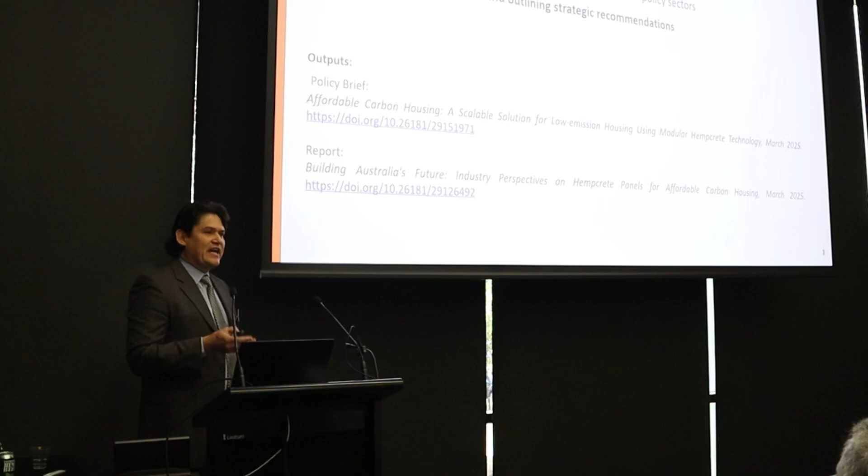Scalable modular Hempcrete panels, alignment with national carbon reduction targets and housing targets. Our next speaker is again from a sponsor, La Trobe University. It's a great opportunity now to hear from, we have a sort of double act happening. We have Dr. Ernesto Valenzuela and Professor David Fleming from La Trobe University. They'll be talking to us about affordable carbon housing using Hempcrete modular panels. I'm sure that'll be close to the hearts of many people here going, well, how can we build out of hemp? Modular sounds like a logical way to go. Industry insights and future actions.

Thank you for the opportunity to be here. It's a great audience to have. It's a privilege. Feeling like I'm preaching to the choir. Everybody's a supporter of the industry, so it's very different than our world of academia. We have to convince the editor and the reviewers.

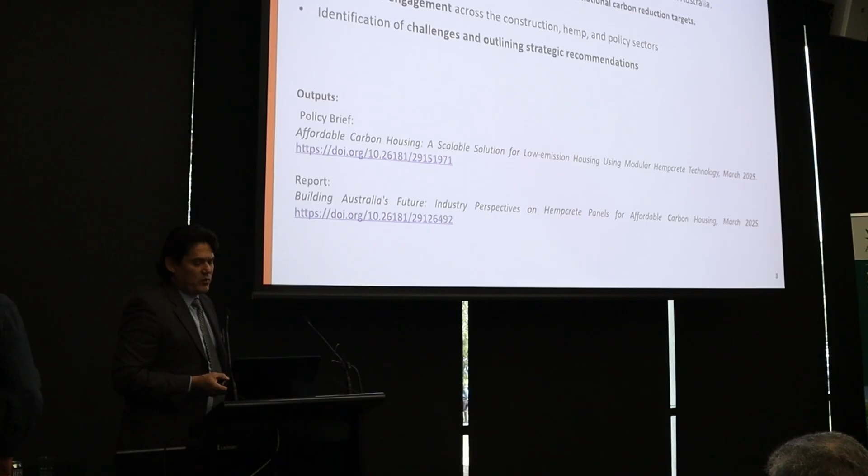We're tasked with an exploration of what could be the potential of Hempcrete to support sustainable housing construction in Australia, with a particular objective geared toward scalable modular Hempcrete panels, and what could be the alignment with national carbon reduction targets and housing targets. We involved stakeholder engagement with members of the construction, hemp, and policy sectors. We identify, for our conclusion at this level, an identification of the challenges and outlining of some recommendations for future actions.

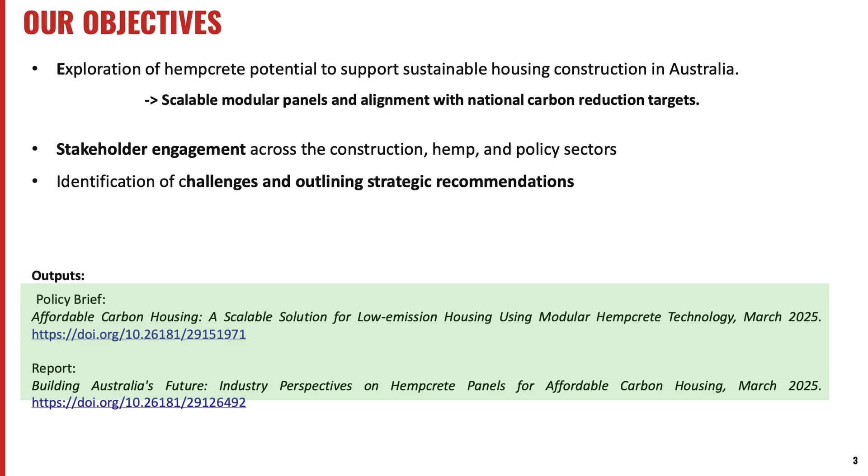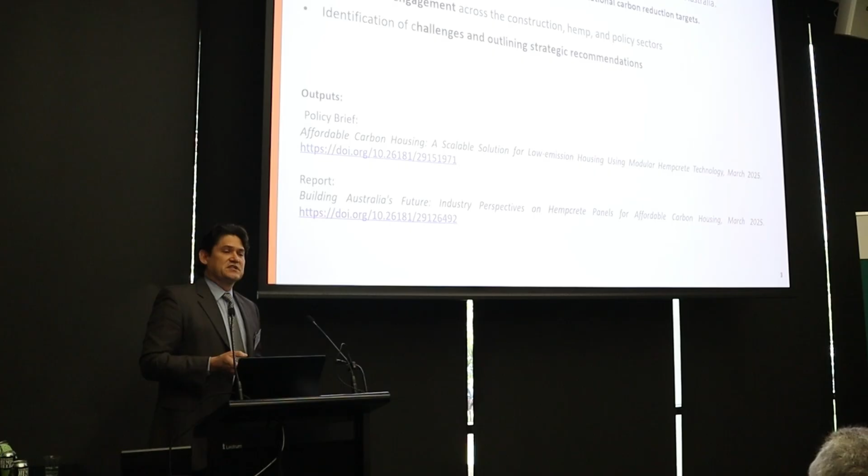We have 2 products available on the website. One is a brief, and another one is a report. I will conclude my presentation around minute 11 or 12, so that Professor Fleming can come and do a sort of call to action, and what are the future steps, the future actions that we're going to be doing at La Trobe University, with your collaboration.

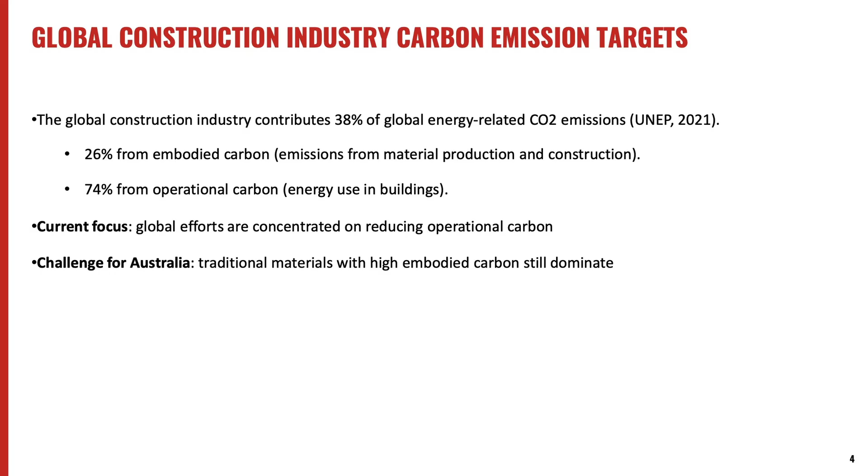So what is the background? The global construction industry in regards to carbon emission targets: we know that it contributes about 38% of the global energy-related CO2 emissions. 26% come from embodied carbon emissions, and 74% from operational carbon emissions. The current focus at a global level is on reducing operational carbon.

We're having a very interesting conversation in the hall about the fluctuating temperatures in rooms now. With all these probably intelligent systems, we never feel all right. It feels too cold, it feels too hot. But anyway, that's because the emphasis is on that.

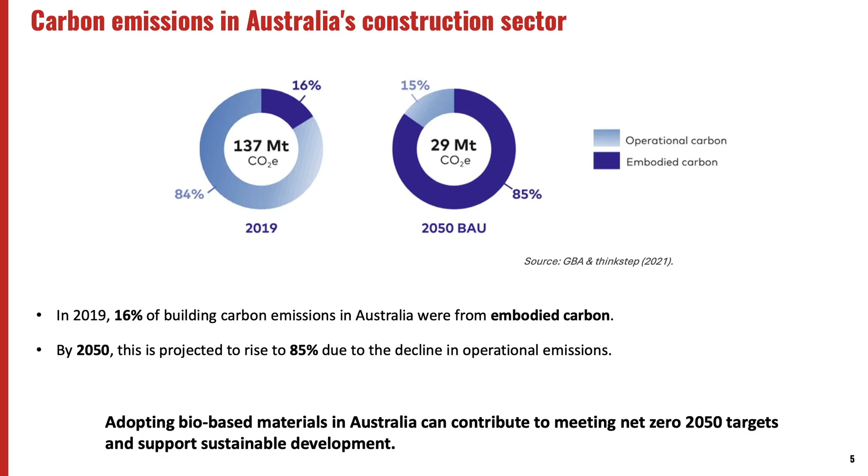The challenge for Australia is traditional materials. If we want to focus on embodied emissions, the current available materials are still very much geared toward a carbon-dominant environment. For the Australian sector, we have the picture for 2019, where 84% of the total emissions are from operational emissions. Doing a business-as-usual projection to 2050, given this concentration on operational costs, it is projected that 85% of those emissions will be linked to embodied carbon. That is the challenge, or the opportunity, for the industry in terms of what it can do better.

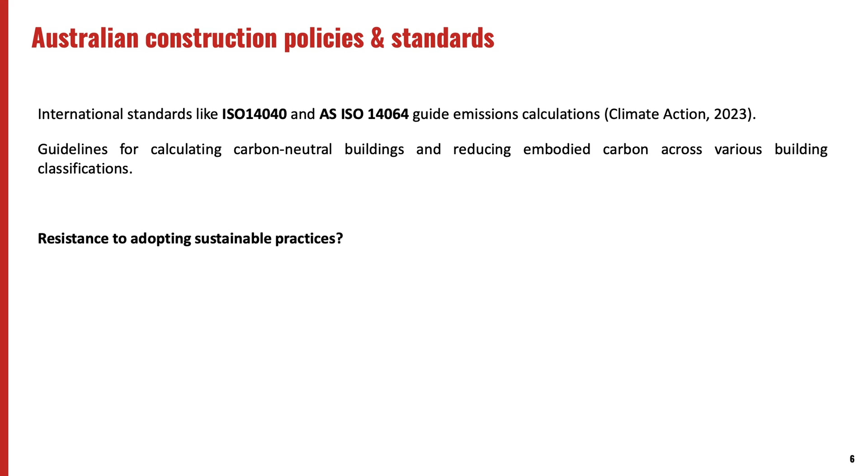In terms of construction policies, we have those international standards. One of the most common comments is a resistance to adopting sustainable practices, or resistance from builders in terms of accepting new materials into business as usual. We have the national construction codes and the updates to the energy efficiency requirements, now at level 6 and moving to 7.

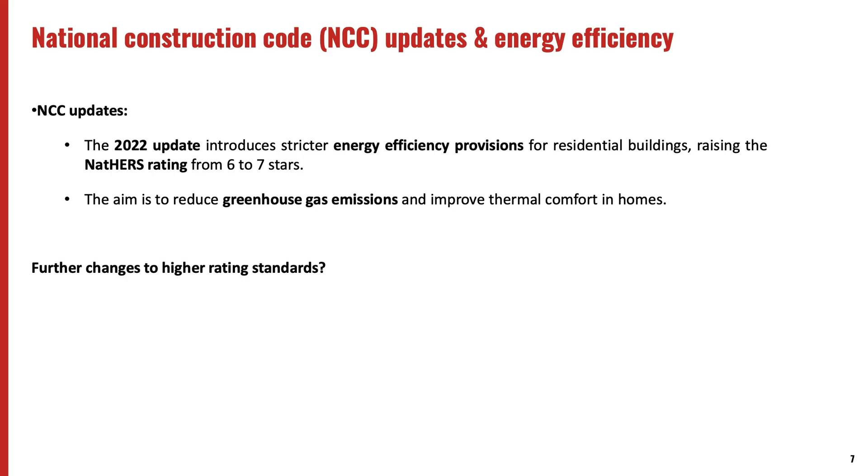This is sort of a moving target, what could be further changes to the higher standards. So how can the industry converge to that and become a solution? Going to what could be the focus of our interest, right?

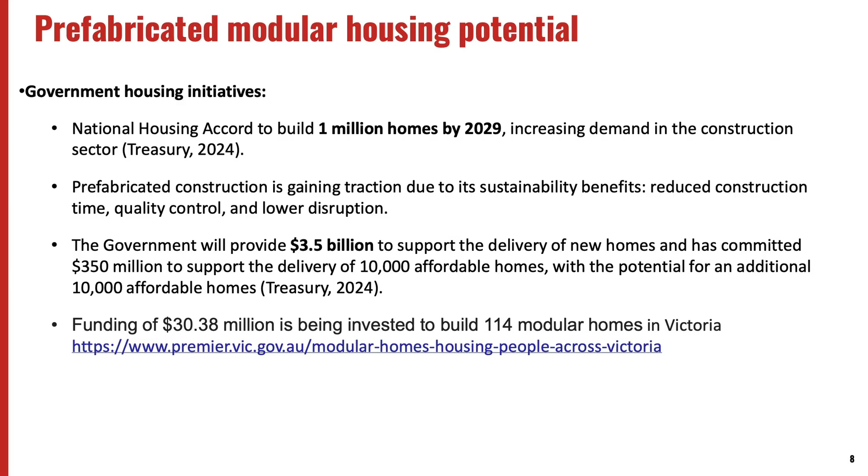So the prefabricated modular housing potential. We have several initiatives from the government signaling towards affordable housing, meeting the carbon emissions targets of net zero 2050, but also the government's intentions to alleviate the current inflation and prices that are occurring. That's where we see a solution. I'll have to skip the question because I don't have that much time, but thank you very much.

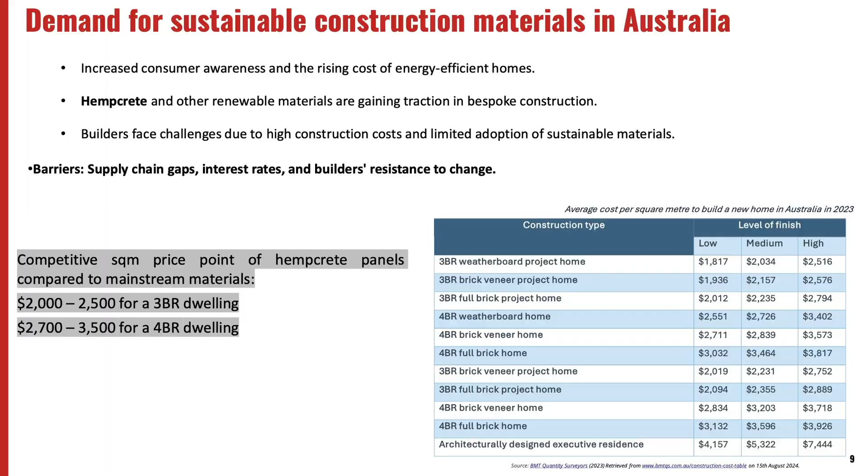In terms of price projections, to our right is the cost data from 2023, to give an idea of price targets if we're talking about hemp construction, modular Hempcrete panels. To our left are the probably tentative competitive prices, to give us an idea where it should be.

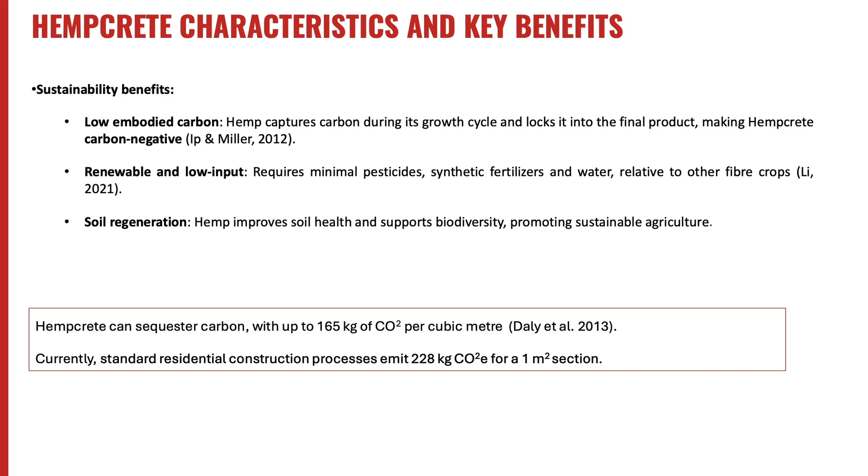We all understand in this audience about the benefits, but probably the more important aspect in terms of the emission targets is the carbon sequestration capacities. We have some facts in there.

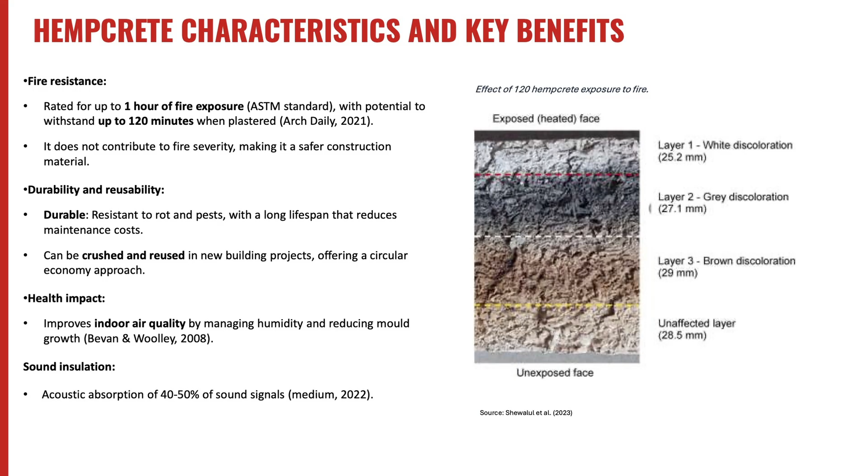We have a wonderful presentation by David, who also gave us generously his time during our stakeholder engagement. He did his private demonstration to us, so it was spectacular.

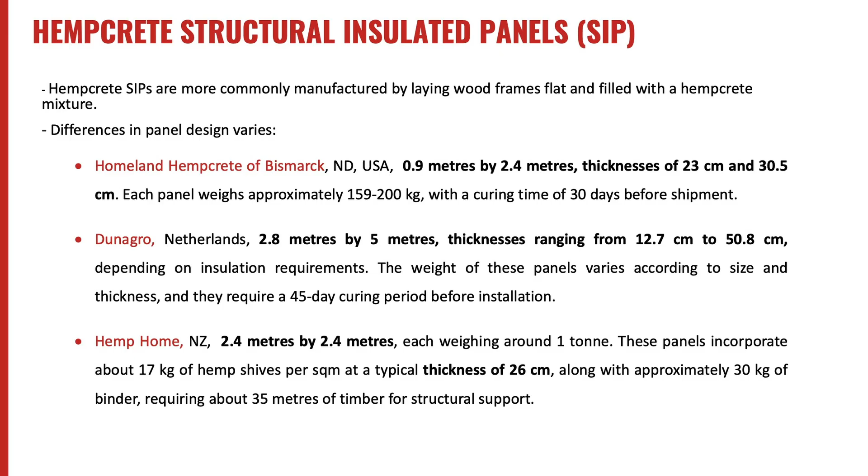When we're talking about these panels, there's this diversity in what is available. We went ahead and tried to put everything together. These are just 2-3 examples that give you this sort of ample variety. That's probably what the industry can converge on, and try to form scales, or economies of scale, and converge on what could be the right product, the right size. But that gives us an idea of the diversity. More details you can find in the report.

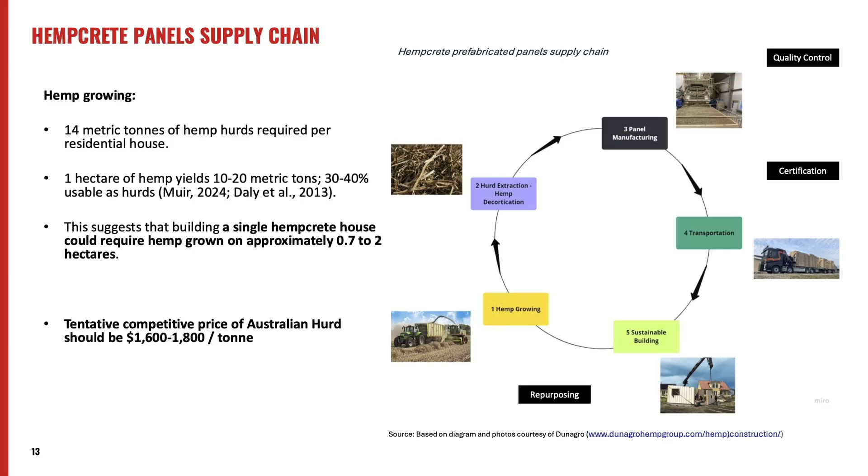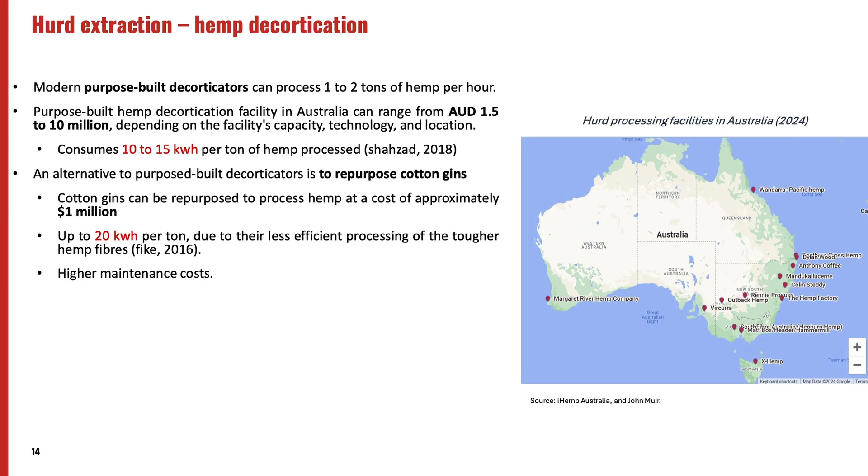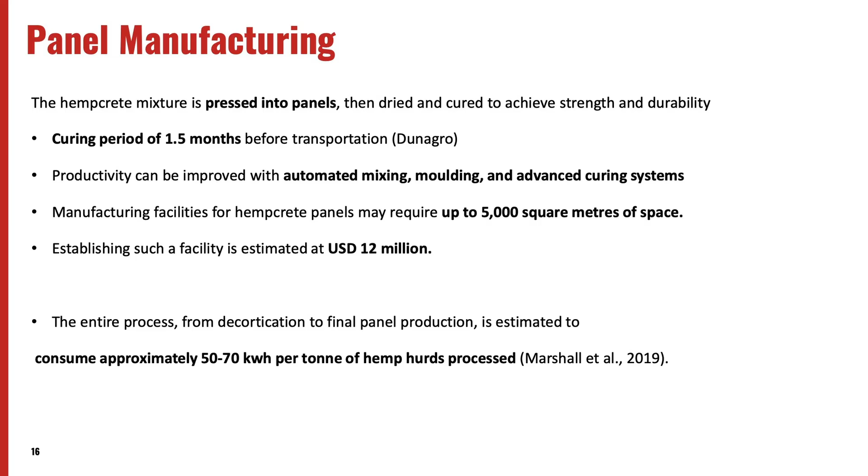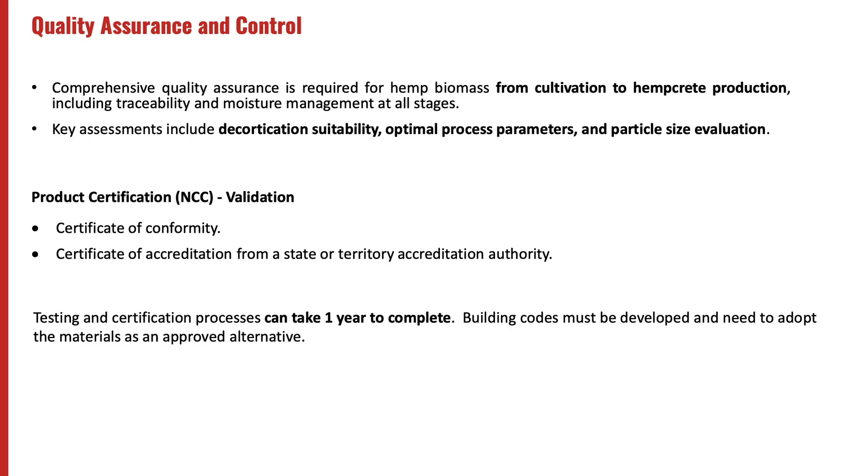In terms of some facts about manufacturing, it has been said that the industry is very insular, very hard to get that sort of convergence. Everybody likes to protect their little baby, so information is not really readily available. You have to invest in making relationships, that sort of thing. But this gives us some ideas of where the industry should be aiming, should be converging in terms of that aspect of the supply chain. Wonderful to follow the conversation on quality assurance, control, and certifications - that's probably where the industry is missing right now. So nothing new in that context.

Now, once we're talking about panel transportation, what are probably the barriers, the challenges? It's going to be the location of the facilities, how important it is in terms of reducing economies of scale or the cost.

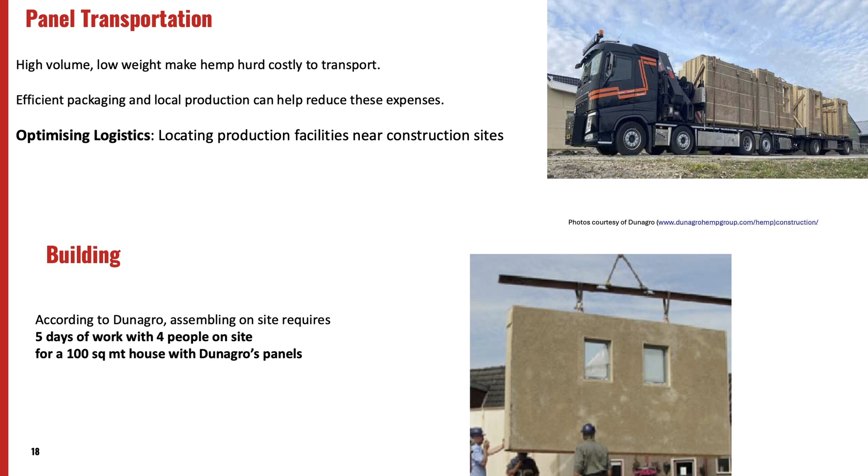Some ideas about Dunagro — we could probably agree that they are the leaders, or right there in front, in terms of the specifications of the constructions. That gives you an idea of the needs of the industry. That's sort of a background.

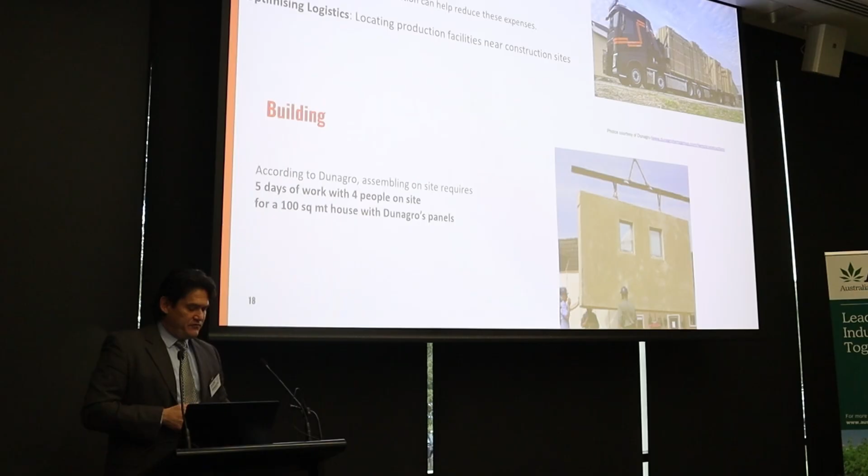So what we conclude — key actions or recommendations for something to happen: the consolidation of these modular Hempcrete panels in this 5 to 7 year horizon. We have the lack of standardization and certification. Industry collaboration is needed, as has been hammered several times by now. We have limitations to local access to hurd, and following approaches in other industries, a more cooperative approach could be the solution.

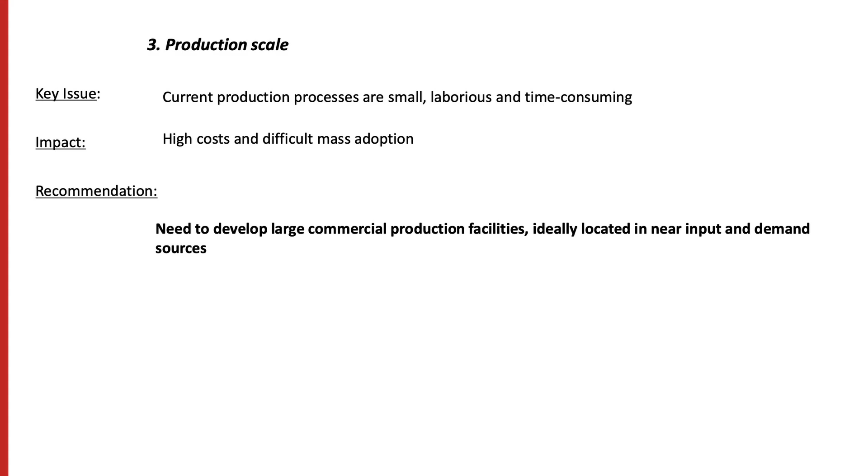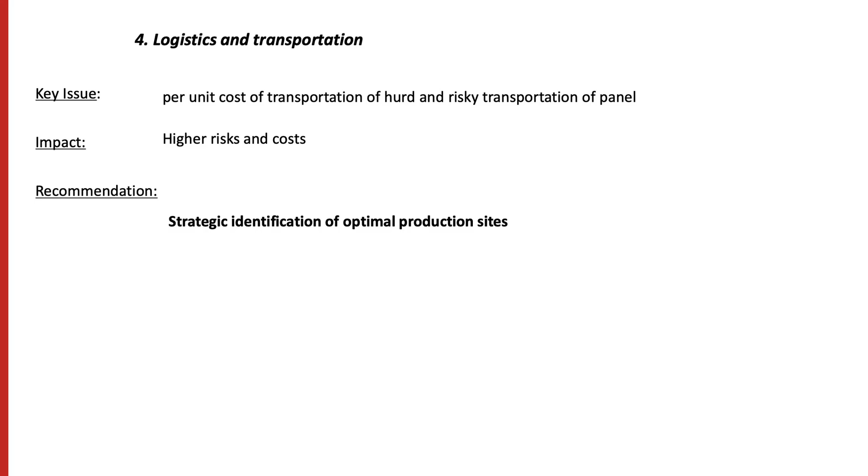In terms of production scale, the industry needs to develop large commercial production facilities — we're talking about the modular panels here — ideally located near input and demand sources. The same could be said about transportation, because of the high cost of transportation, or the risky element of transporting the panels. Land availability and cost is also a prevalent issue.

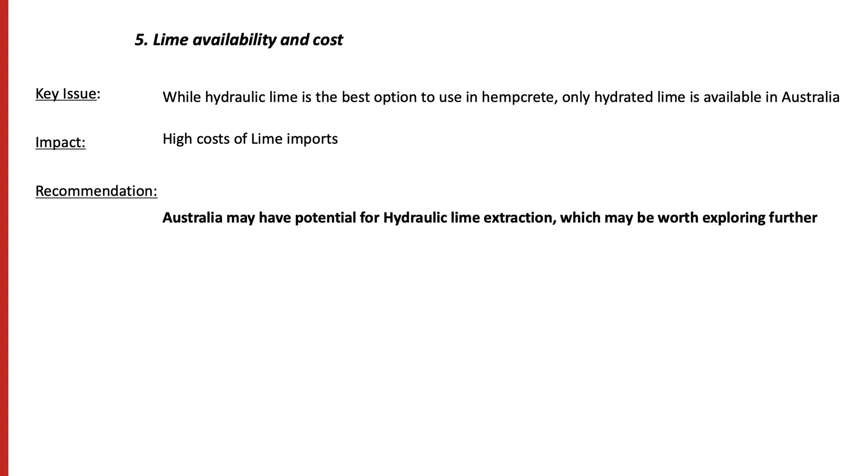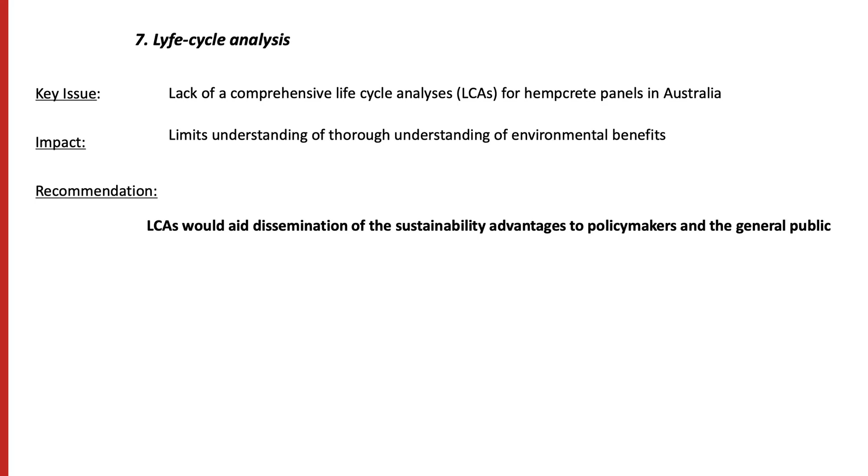Life cycle analysis is certainly missing in the industry, so that's something that could put the industry in a better standing.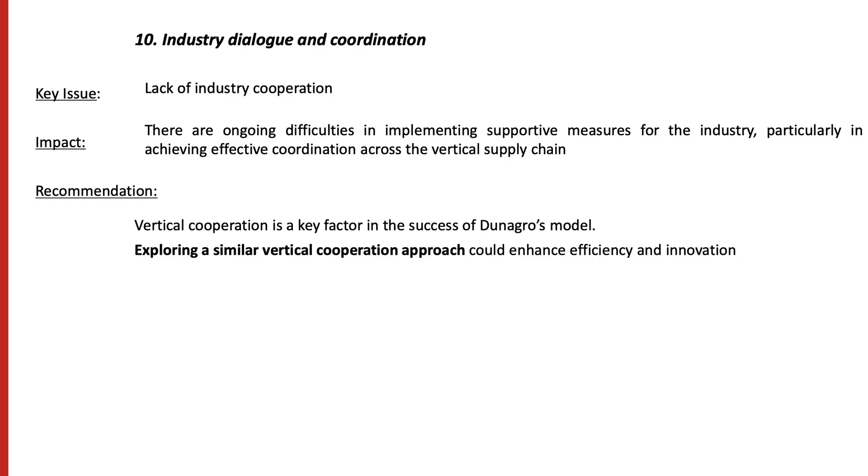My final point, and then David will cover what I mentioned as a call to action. Dunagro is probably a very successful example in the industry, so exploring a similar vertical cooperation approach in Australia — that could be how we mirror that successful story. David will take it from here, and once more, questions, and the link to the report. Thank you.

David Fleming Munoz, originally from Chile — that's my accent, even though my last name is Fleming. I'm not Australian, I'm Chilean. Well, I've been in Australia 12 years, I'm Australian now, but...

So Ernesto and my colleague Julio, with support of the Warner Research Institute, did this project — it was like an industry consultation, my colleagues talked to many of you. In the next couple of years, what we want to do now, and what we're working on, is put in an ARC linkage bid, where the idea is to address some of the issues Ernesto talked about, but talk more in the language of politicians.

To try to put the dollar value in front and say, look, these are actually the costs, these are actually the benefits of the industry as we go forward. To do so — and happy to talk more tonight at dinner, I'll be here tomorrow as well — we've been working with Phil at the Warner Research Institute, and also talking with Australian Hemp, and both are supporting the project, so we're going to put the bid together for the ARC linkage.

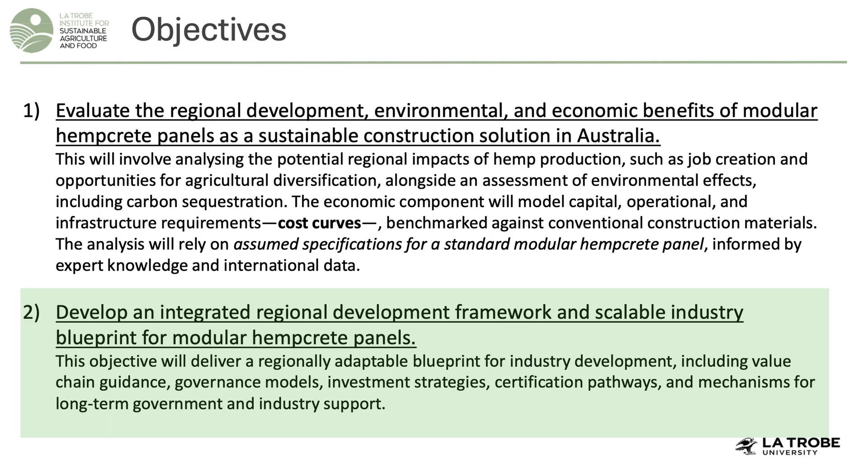We want to build that based on what we've been discussing with Phil — it's sort of reverse engineering. We say we want 10,000 affordable houses built with Hempcrete modular panels. What do we need to achieve that? Then we try to make the business case considering a regional context.

We need to find a particular region in Australia where we can model and capture all the connections needed in the supply chain to achieve that goal, and estimate and calculate the costs as well as possible. That blueprint for developing the industry in a particular region can then serve as a guideline for other regions to do the same.

It's quite ambitious, and it will be based on a lot of assumptions because, as we know, the industry is still not well developed. But these are important assumptions to make, because if we want to achieve a goal, we need to aspire to it and define what needs to happen to achieve it.